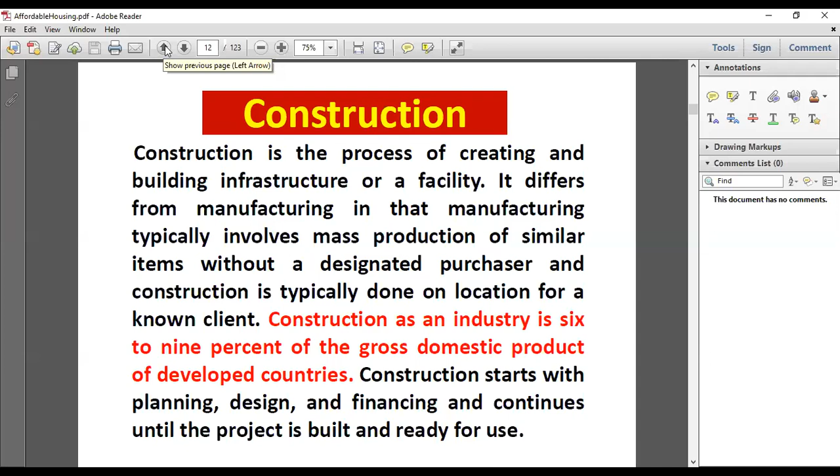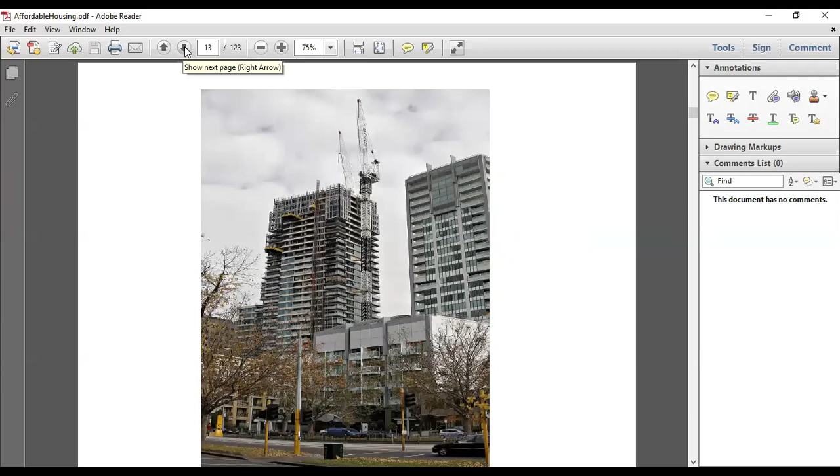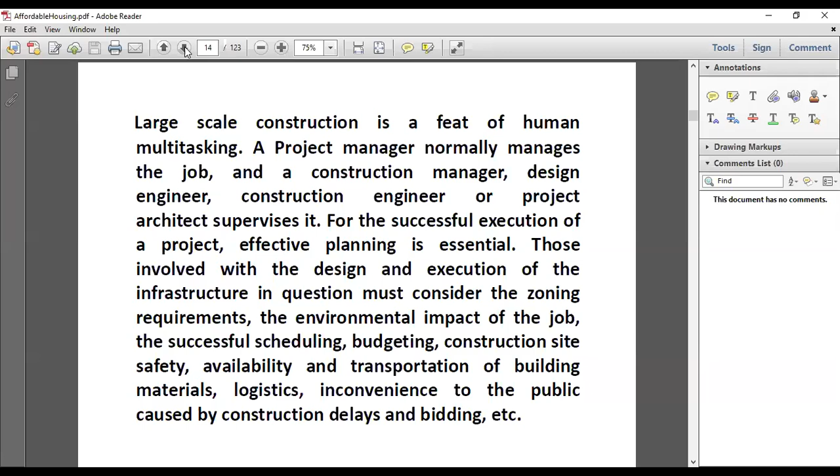This is the picture in every city. You will see high-rise buildings coming up, lifts and cranes are there, and construction is going on. Large-scale construction is not possible only by civil engineers. Now you need a mechanical engineer for firefighting and lifts, an electronics engineer, and a computer engineer too. So many people are involved in a big project. This is a multidisciplinary approach that we are going to adopt in construction.

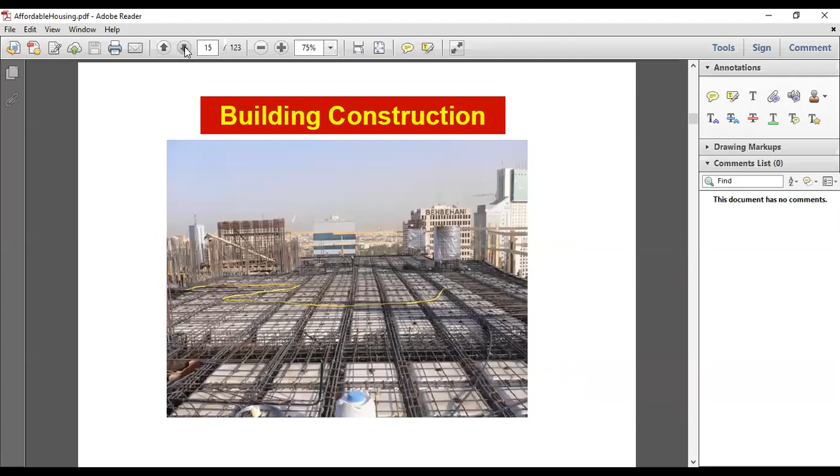This type of thing is going on everywhere. In every city you will see construction happening, maybe even in your neighborhood. This is a big challenge, and this scenario is everywhere prevalent, whether it's Varanasi or Bhopal.

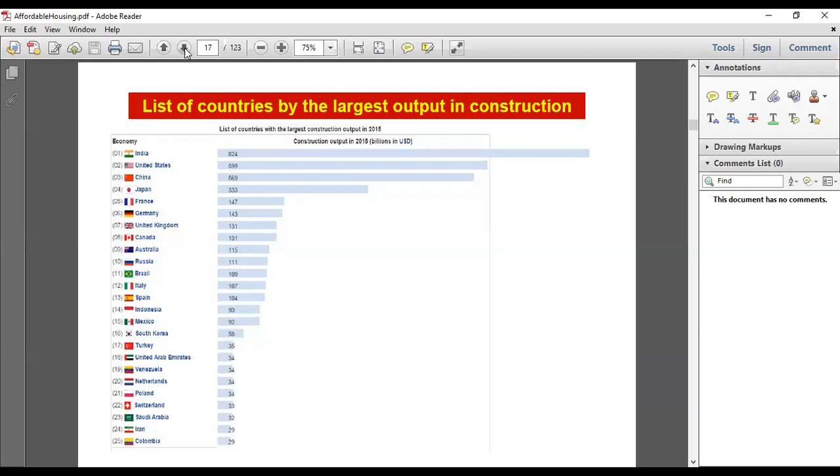There are following phases of construction: planning, design, and execution. In the planning phase, if you have not planned a building and are making construction without a plan, the building is not going to survive an earthquake, because the first part of earthquake-resistant building is good planning. If you make an unplanned building with a different shape that is prone to earthquakes, whatever material you add, you are not going to make it safe from the earthquake point of view.

So planning is very much important, and planning is important in every part of our life. I think without planning you should not do anything, because otherwise you will have to repent it and go back. So without planning, I think we should not do anything, like in building also.

Then comes the design, where application of modern software tools is there now. If you are a civil engineer, a BTech student, you must have knowledge of STAAD, ETABS, SAP. These are the software, because nowadays methods like moment distribution, slope deflection, or Kani's method are not being used in practice. We teach them in class, but when it comes to the design part, we go into the software only. So we should know the language of the software, and I request all students to get some training on this. In IIT, we have a 2 semester project where we give this software-based training through exploratory projects and UG projects, where students have to analyze these softwares. This is part of our curriculum, and I think you should take advantage of it, because any design nowadays is only done on software.

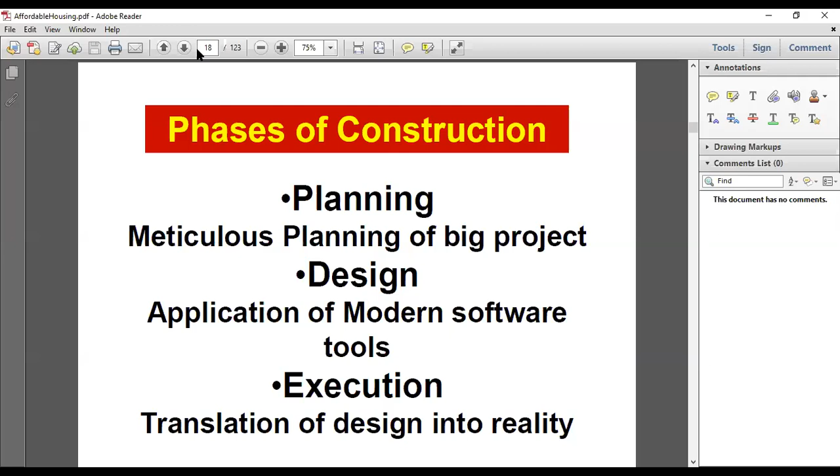Execution is also very much important. So these are the construction phases, and now building material. Without material, you cannot make anything. Material makes your dream into reality. So what are the building materials nowadays?

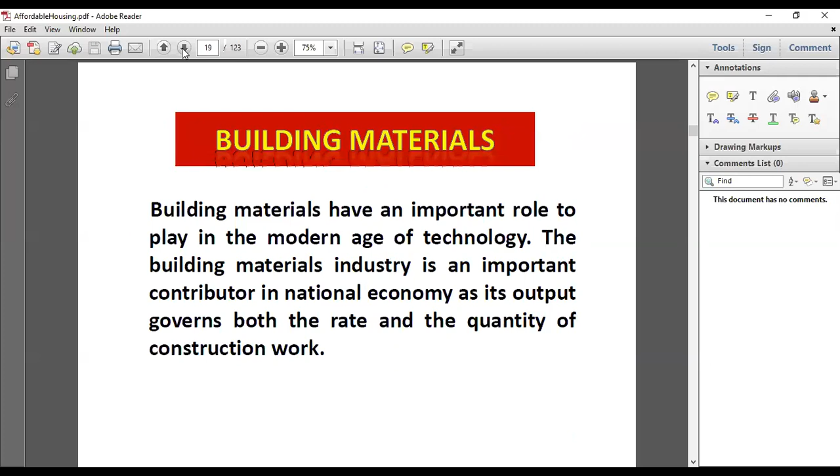Material requirements are very stringent nowadays. You want a material which has strength at both low and high temperature. If you have sub-zero temperature and also a very high temperature in summer, your material should sustain that. Previously this was not required, but nowadays we have materials designed to sustain huge variation in temperature.

Resistant to the ordinary water and sea water. If you are making coastal area, then there is salinity in the water, and you have to make it resistant to that. Otherwise, durability will be hampered, and the building will deteriorate.

Then alkali and acid. Nowadays you see that a lot of acids are there in the environment. And today is World Environment Day also, so I should congratulate all of you - let us save our environment and do something, so that as an engineer, it is our responsibility to save our environment as well.

So alkali and acid is the pollution which is coming in the form of acid rain and all those things. So we should also select the material which is resistant to that.

And material for interior decoration - now you see interior decoration is taking a big role, and many times the cost of interior decoration is more than the cost of the building itself. So you have to choose the material which has long life and which gives good quality.

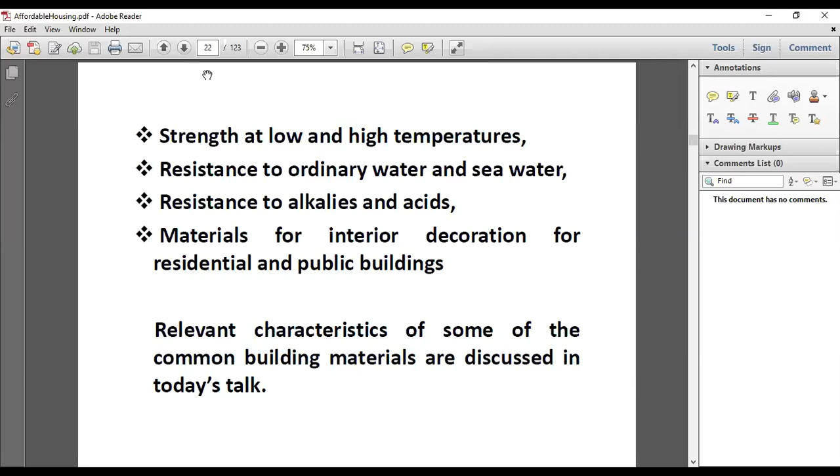So these are the characteristics by which you have to select your material, and this is the judicious selection by a civil engineer. So these are the materials which we commonly use. And today this is a very preliminary lecture.

So in this I am just going to talk about some very simple tests which we should perform on these materials so that you can know what is their quality.

Because I am going on many sites here in UP, and I see that they don't do the basic testing of the materials. And that's why if you make a full building without doing any test, then after 5 years deterioration takes place, cracks are coming.

Now people ask what is the use of a civil engineer when a building doesn't have a life of 5 or 10 years? Even a mason can do that. So now this is a question mark for our engineering education.

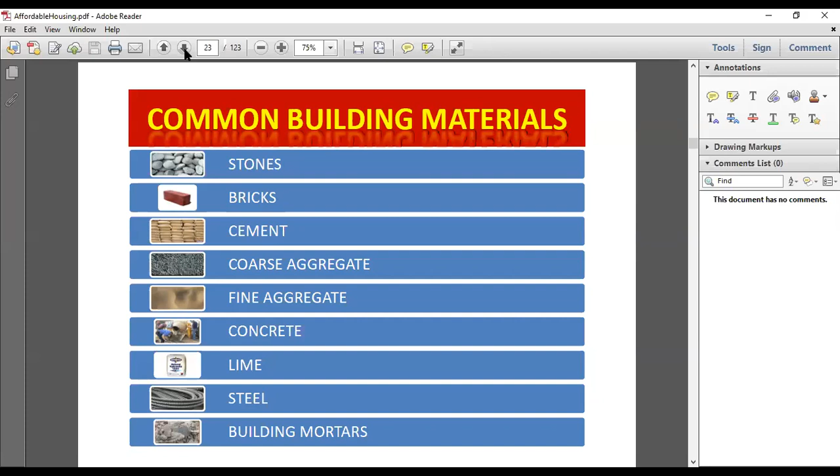So that's why I request all of you that at least you ascertain - like in stone, I will tell you that you just have to make 2 or 3 tests. If you just do 2 tests, you can improve the quality of the stone. But we are not even bothering about the 2 tests. So what are those things?

And if you see the history of material, you see that man has been using material since 8000 BC. Before that it was Stone Age, Mud Age, then came the sun-dried brick, and burnt clay brick came in 4000 BC when fire was discovered, and then came lime for binding material, which is now totally replaced by cement.

Then glasses came, and then you see aluminum, and after that iron products started being used in 1350 BC. So you see quite old material, and nowadays composite materials are very much used, and cement is also a very latest material, you can say.

It was invented 150 years back in England. So this is a very good type of binding material, and in the market you can see there are 20 to 30 types of cement available for different applications.

Now which cement you will use for which application, that knowledge has to be there. Because if you are having some low heat type of work and you are using high heat cement, it is going to make a crack. So for dams, which cement you will use, for buildings, which cement you will use - that's why we must know the quality of the material.

And if you are having some low heat type of work and you are using high heat cement, then it is going to make a crack. So that's why we must know the quality of the material.

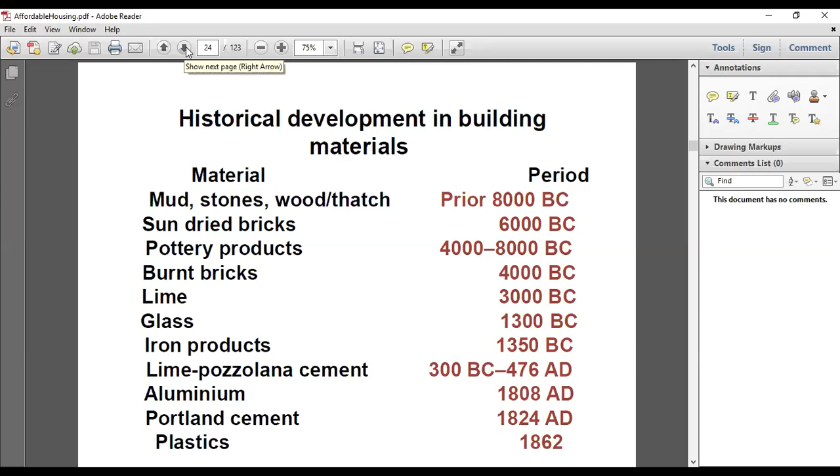Difficult, very costly - transportation is very costly, so we don't use it. But sometimes for cladding purposes we use stone. Our inner part is brick and outer part we make stone, to make it a massive structure.

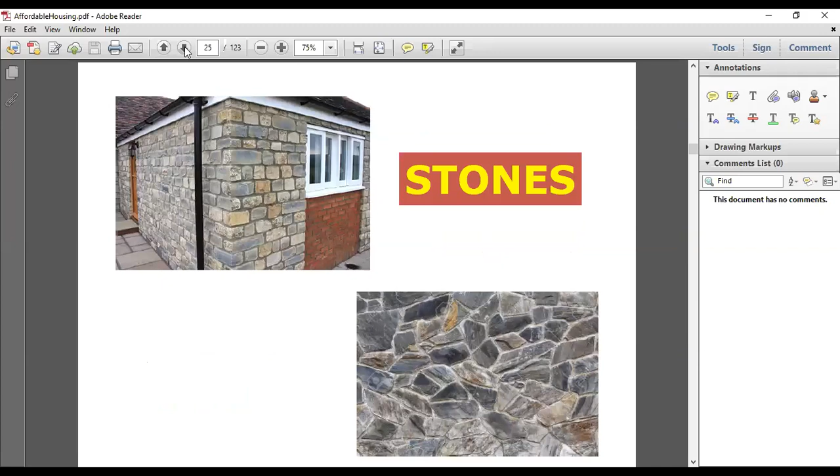But if you are using stone for your application, then what are the tests you have to do? You just simply do 2 tests: strength and durability. You know that stone has very high strength, and sometimes strength can be as high as steel itself. So for the compressive strength of stone, like granite or sandstone or any type of stone, we must do the cube test in the lab.

Suppose somebody is giving you very low strength and saying it is granite. How will you know that it is granite or not? Just by color, you cannot say it is granite. So this will come from the strength testing.

You must do the strength testing in the lab. And many times I've seen people become very complacent, and whatever the supplier is giving, they believe in this and they don't do any engineering judgment.

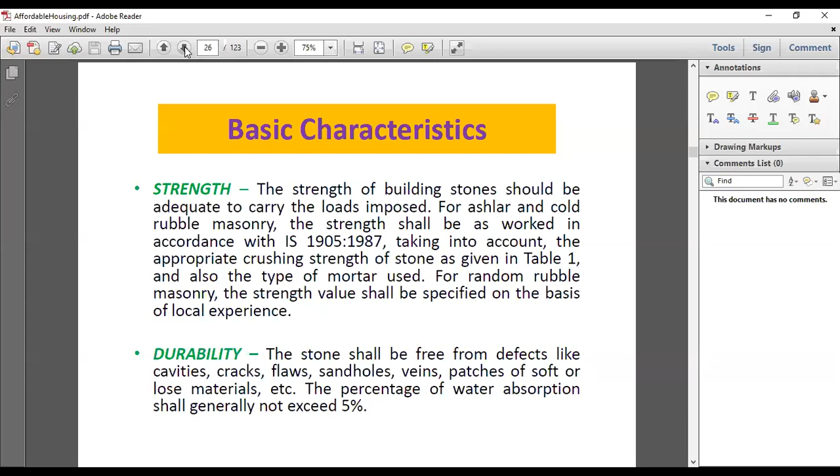Second test is durability. A durable stone must absorb very little water, it should not exceed 5%. If it is soaking more water, then it is not durable, so you have to discard that stone for building construction purpose.

The code has given this test data: for granite, the strength should not be less than 100 MPa. Similarly, sandstone 30 MPa. If somebody is giving you marble, you test it, and strength should not be less than 50 MPa.

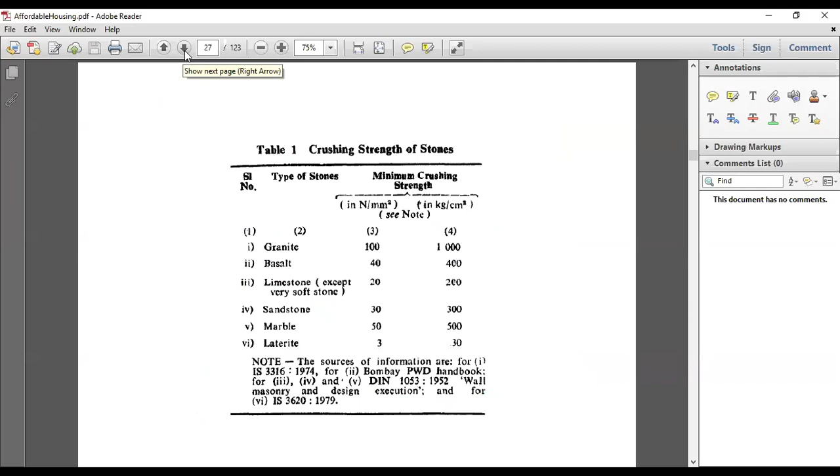So these tests are a must, and as I said, water absorption should be less than 5%. These two simple tests, if you perform on your stone, you are going to enhance the durability of your building. But many times we are not even bothering about these two tests.

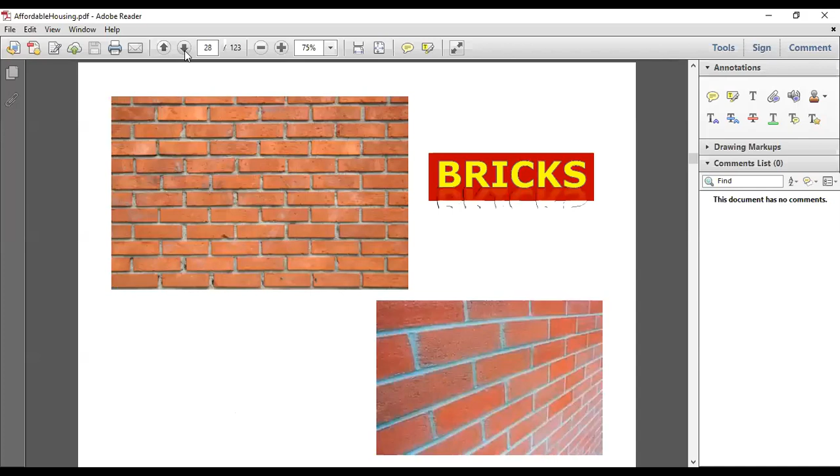Now comes the second material, which is brick. Bricks are nowadays being used only for the partition wall. We are not making any load-bearing structure, especially in villages people are making, but in city areas we are making frame structures where brick's role is only partition.

So what are the tests that you have to perform on the bricks? Many times you must have noticed there are white patches in the bricks, and how to ascertain this is important.

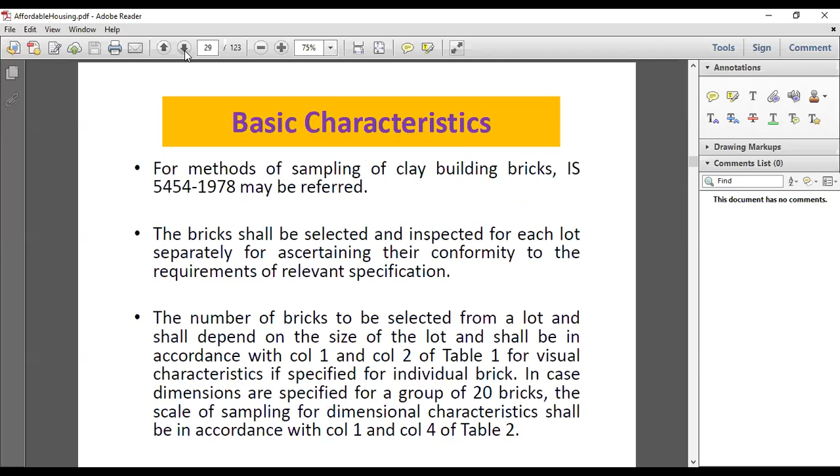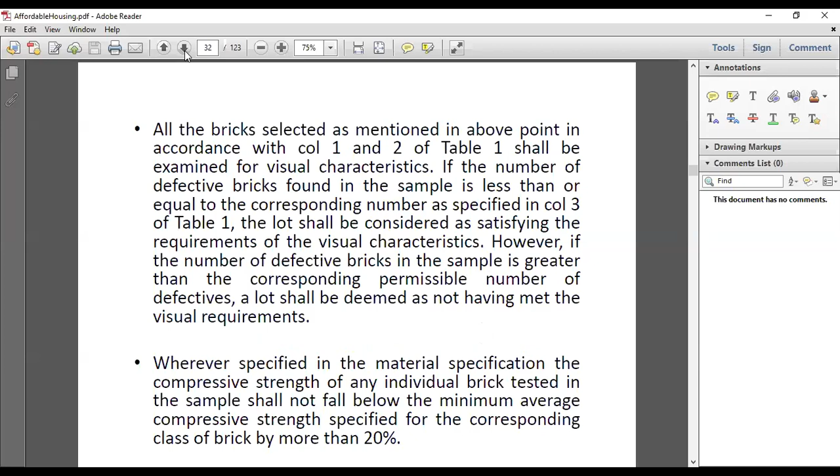These are the dimension tests, where you select a sample of bricks. I will give you this simple test to classify the brick, and there are classes up to 35 class of brick. We make the selection. This is the building brick where strength has to be up to 35 MPa, and this test you have to perform in the lab.

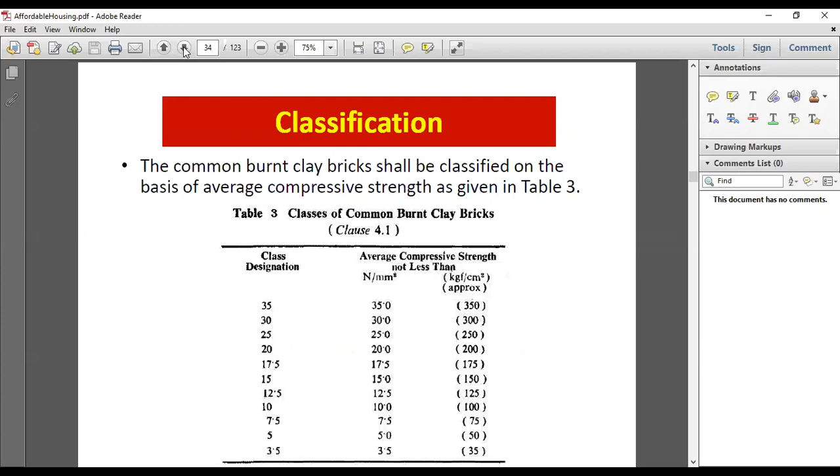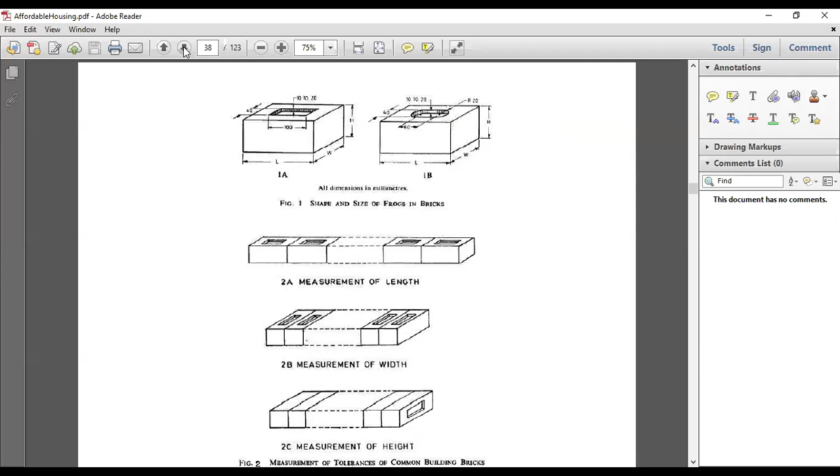This is the dimensional test, what should be the dimension of 20 bricks when added together. You lay the bricks one by one, and test the combined length of 20 bricks, then divide by 20 to see the average. A plus-minus tolerance is given in the code. There should be no warpage and no bending, all those things need to be checked.

Now compressive strength test, this will give you the class. Water absorption is also very much important.

If brick is soaking more water, then there will be damping in the building all the time, and this can cause asthmatic problems and so many diseases because fungus and bacteria will develop there. So water absorption should never be more than 15% for first class brick, and for second class brick it can be up to 20%. If it is soaking more, then it is a problem and you have to remove it.

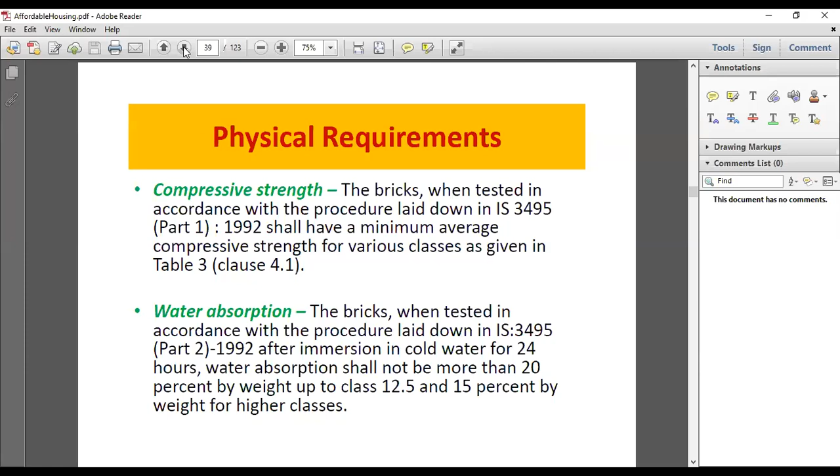Now one test is called the efflorescence test. Many times there are white patches in the bricks because of the alkali available in the soil. You have to remove this immediately, otherwise no plaster will stick on it, and your building will always have damping, and unclean scenes will be there, which is not desirable.

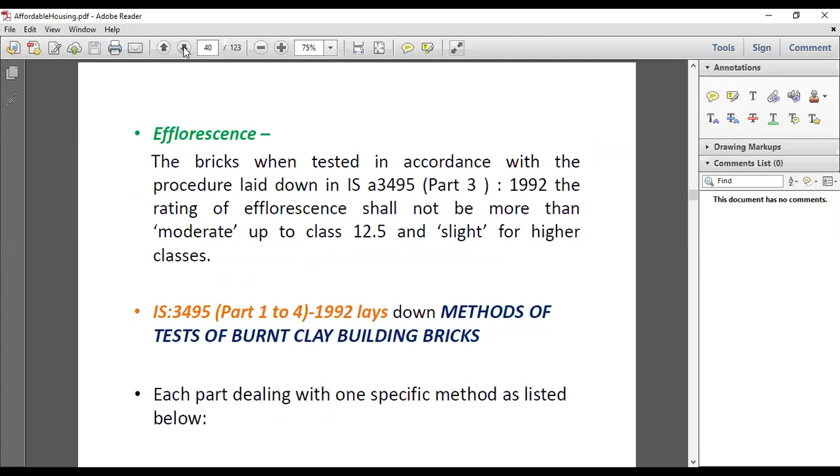So these are the codes dealing with bricks. IS codes are there, many codes are there. I'm just giving the list, so this can be used.

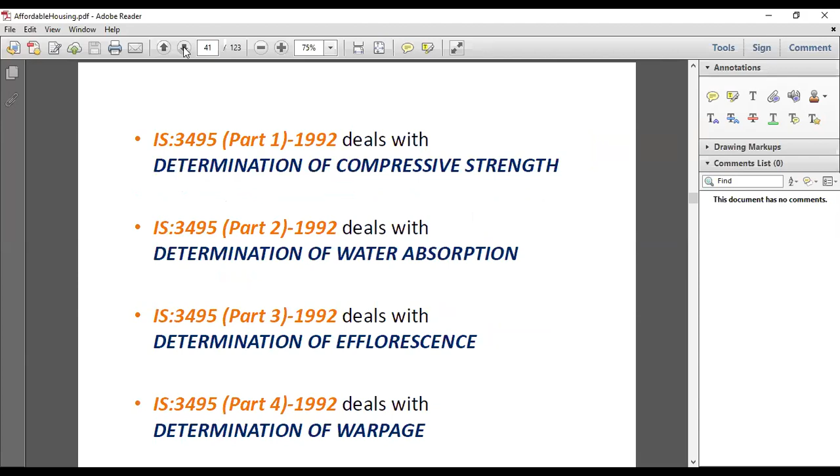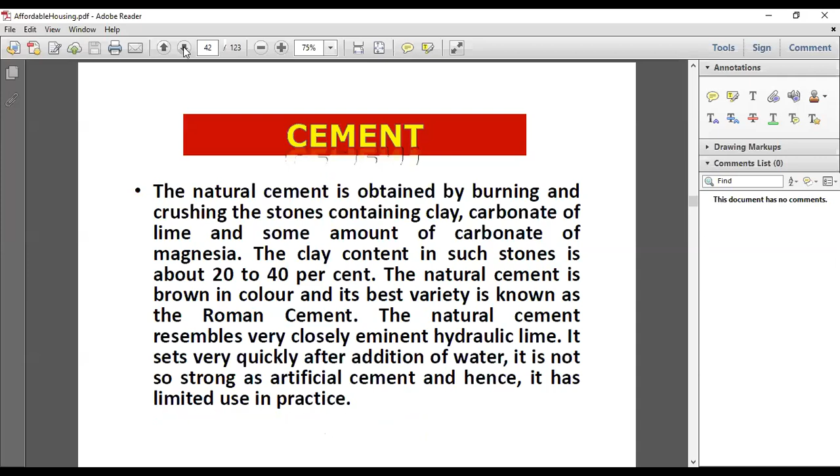Now the other material is cement, which we use as a binding material. This is mostly used now, lime is not used anymore, and cement was invented 150 years back. So what are the tests we require?

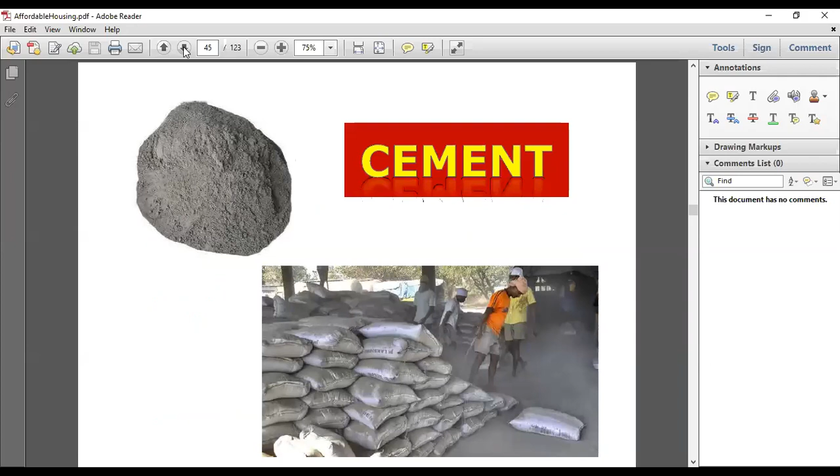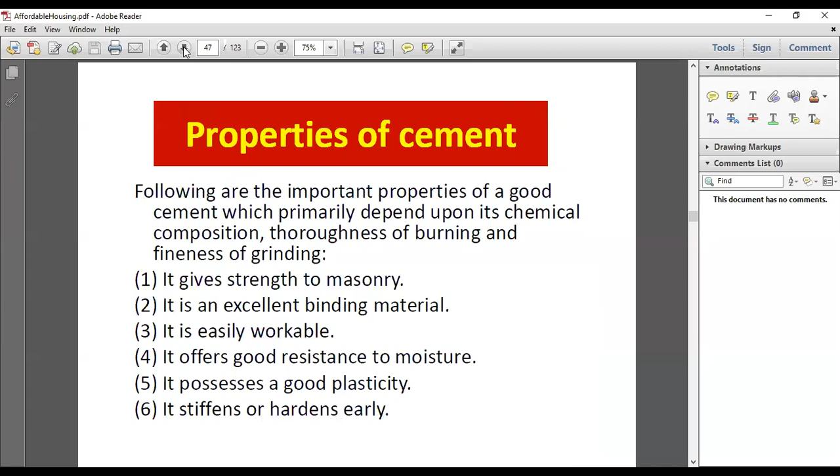Many times we have to do the chemical composition testing, whether cement is adulterated or pure, you will not know. These are the properties by which we test cement. One test is specific gravity, which should be more than 3.15. If it is less, it means there is some fly ash addition or something, and you have to reject it. Many times people cheat, supplying bad cement while charging full money. If you do this test, you can find out.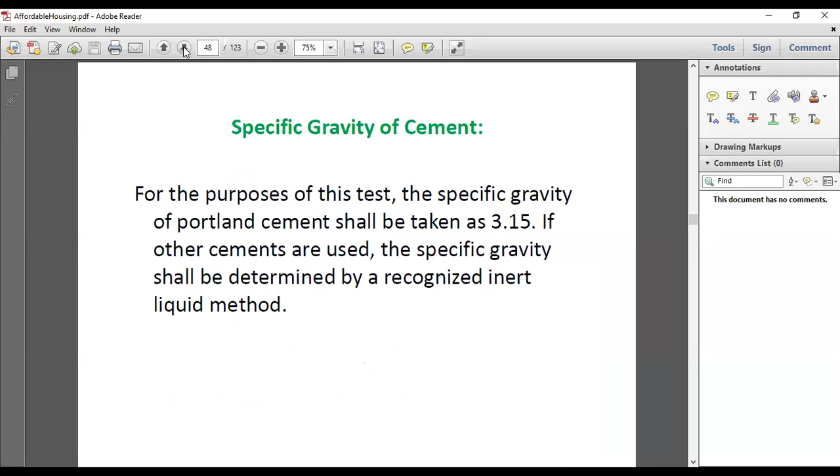Other test is fineness test. By sieve analysis, in 1 minute you can find out the fineness. Then comes soundness test. It should not expand much, it should not contract much, otherwise durability will be hampered. For this, simple tests are there.

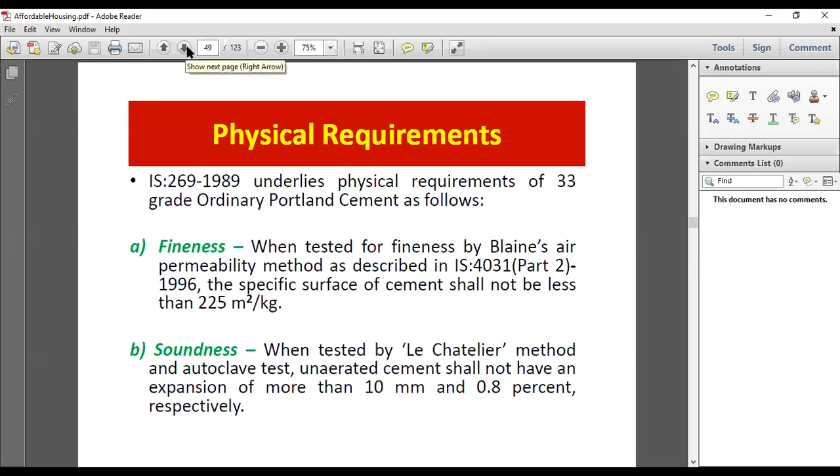Other test is setting time, both initial and final setting time have to be tested. Many times cement doesn't set because it has been adulterated with fly ash. So it is not setting, and when you remove the prop, the whole slab comes down. This is the problem of setting time, so this has to be tested.

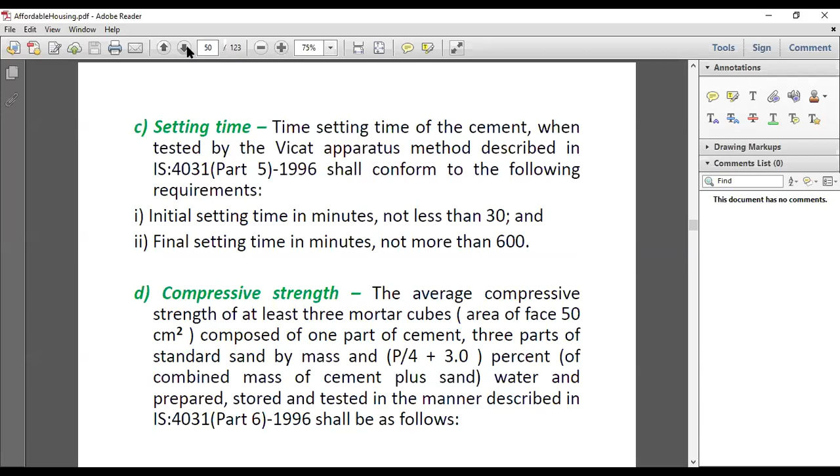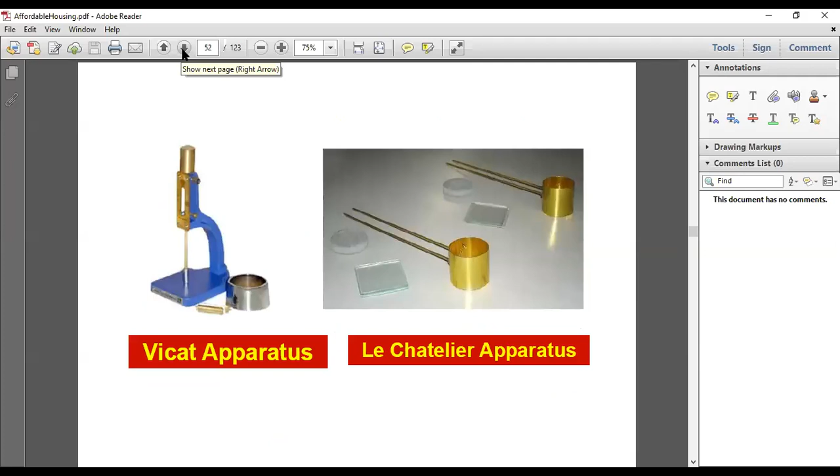Compressive strength test is also needed, whether it is 33 grade, 43 grade, or PPC, you have to check which grade of cement it is. I think in UG classes you must have done this. The 28 day strength must be 33 MPa. These are the things we have to perform, and these are the equipment. I think you know all these things we have used in our labs.

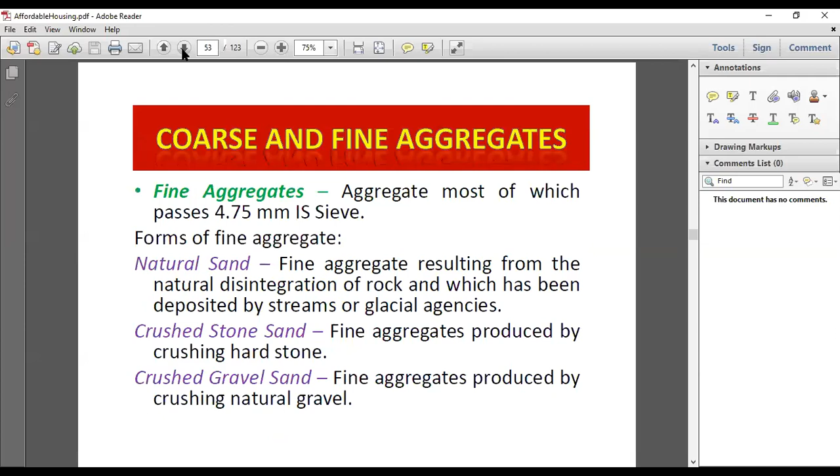Now one of the big problems is aggregate. You know that in concrete, 70% is coarse and fine aggregate, but we never test it properly. Sieve analysis is a must for this, and through sieve analysis you will know the gradation. Because if there is not full gradation, there will be voids, and there will be water absorption, acid ingress in the concrete, and it will reduce the strength of the concrete.

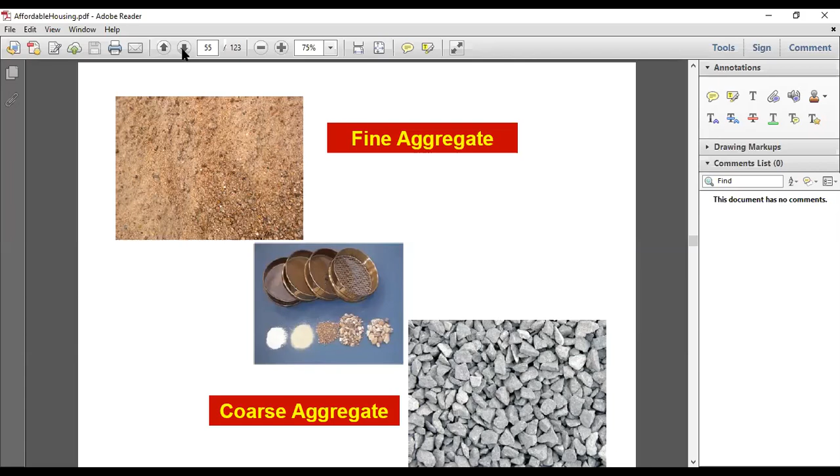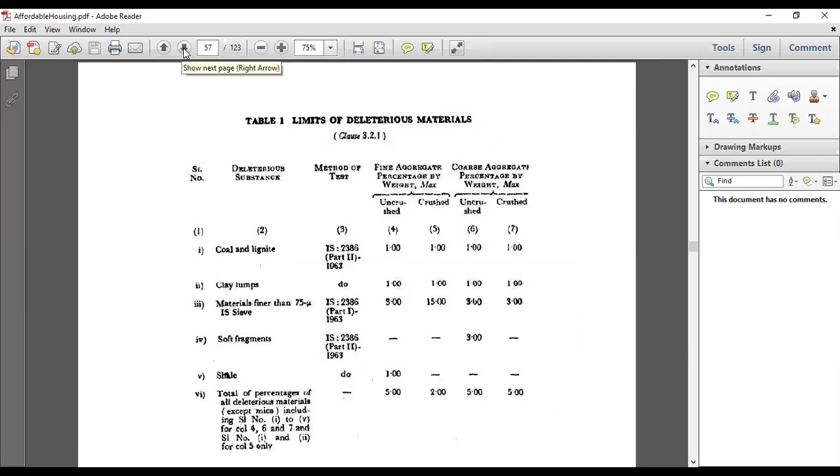That's why there are many times deleterious materials—coal, clay, soil—but people don't remove it. This has to be removed because aggregate gives the strength. Cement's role is only binding, cement doesn't give any strength. The strength is given by the aggregates. So they have to be perfectly graded, so that there is full packing and no voids available for moisture to ingress.

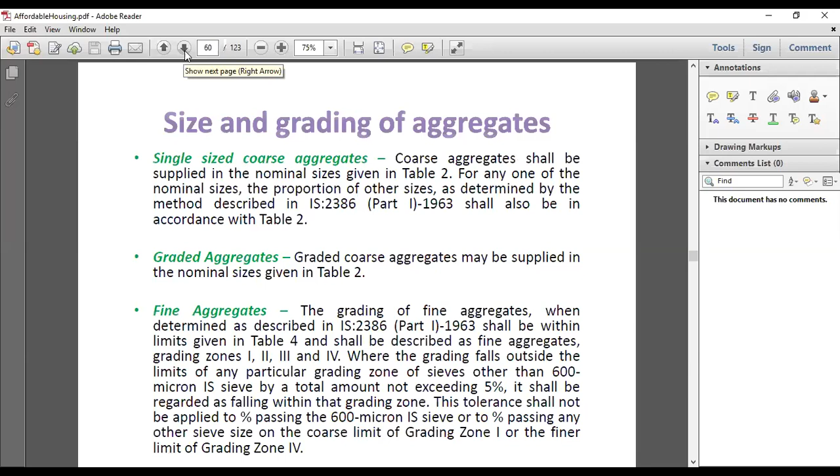These are the tests we do: aggregate abrasion test—if you are going for road construction, then you have to do abrasion test. Similarly, you have to do the soundness test. And for fine aggregate, you know that we should use zone 2 sand, but many times people are using finer sand, which is zone 4 or zone 3. That is not desirable, otherwise you have to compensate with proper cement.

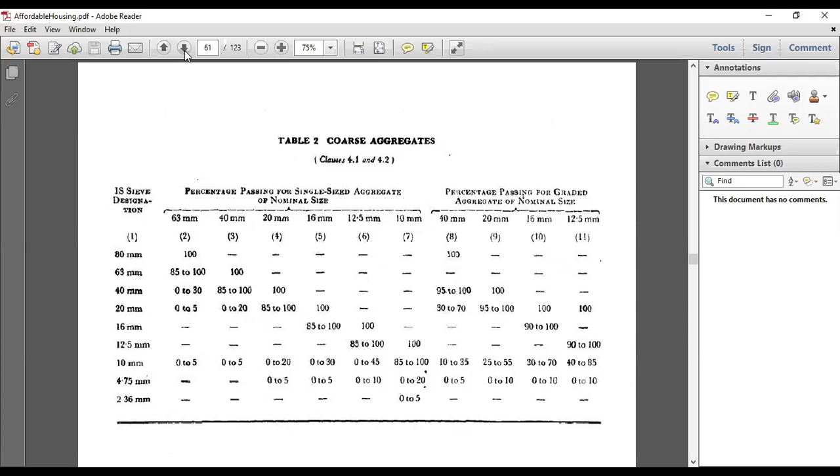If you are not using proper material in the concrete, you should not expect proper strength. If your input is bad, then the output is bound to be bad. That's why concrete is a composite material which you produce at the site, so you have to take full precaution in that. These are the aggregate tests.

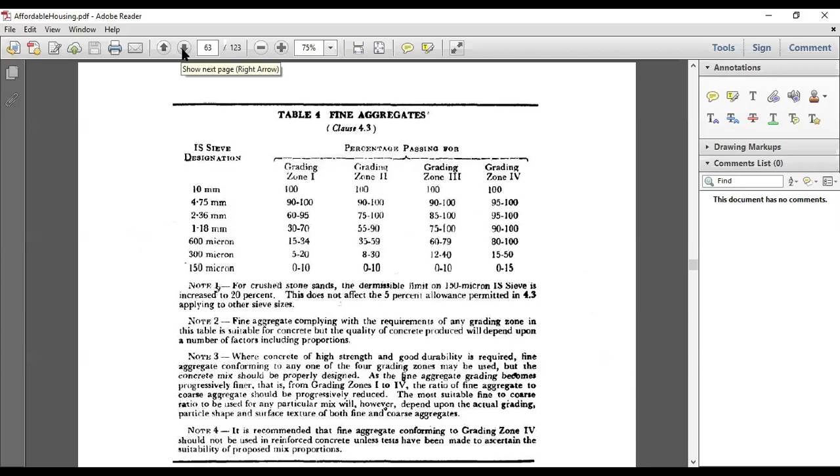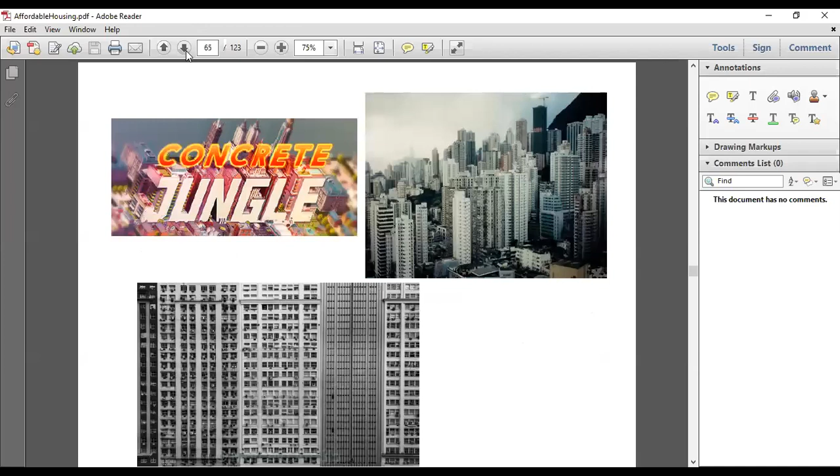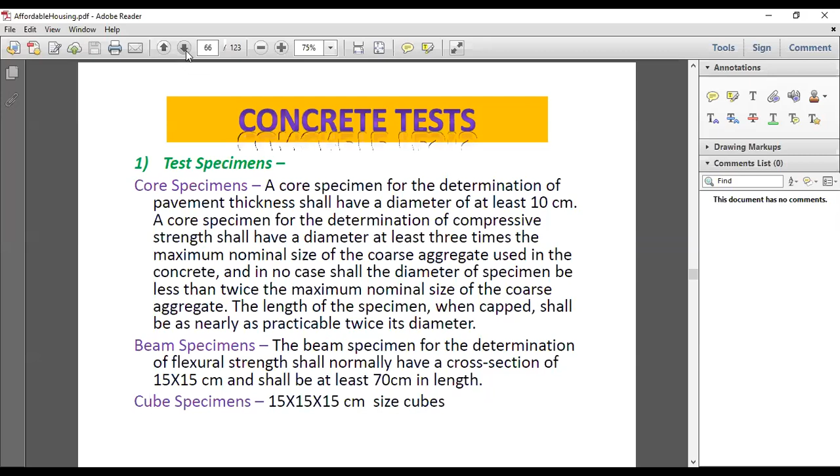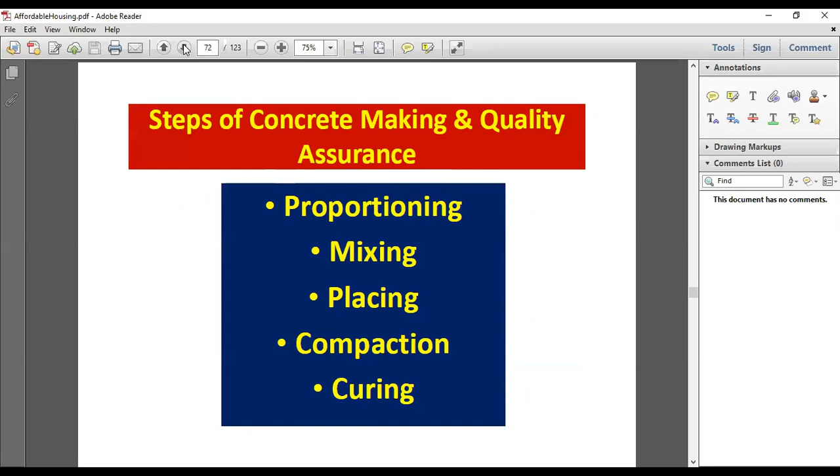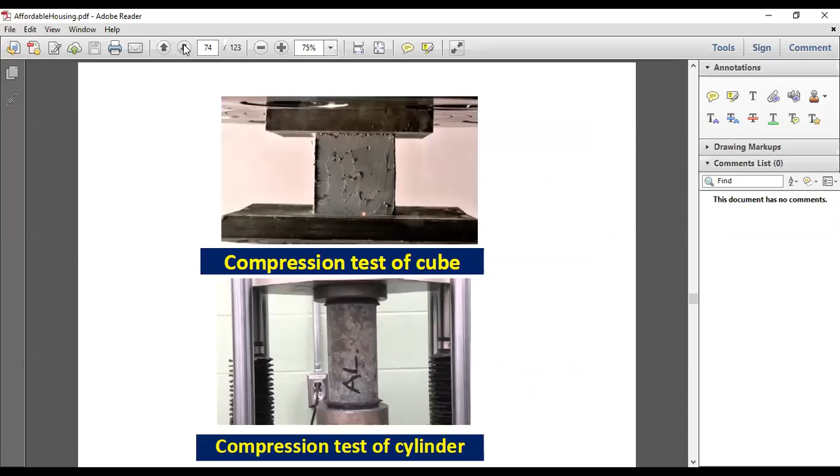In each part you should have the quality, so these are the various tests that we do. We can do the compression test by cylinder, or what you can do by the cube. So this has to be ascertained. And tensile strength is very much important. We should do by split tensile test, and then we do the flexure test, by rupture test, by bending. So in this way, you will come to know what is the tensile strength of your concrete.

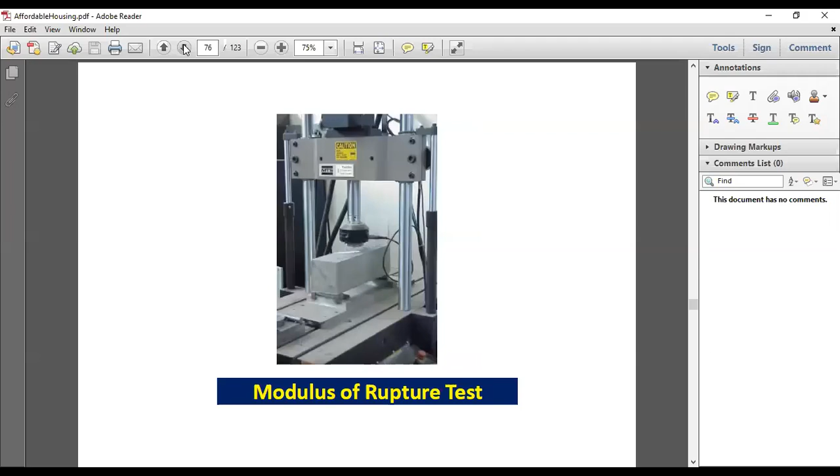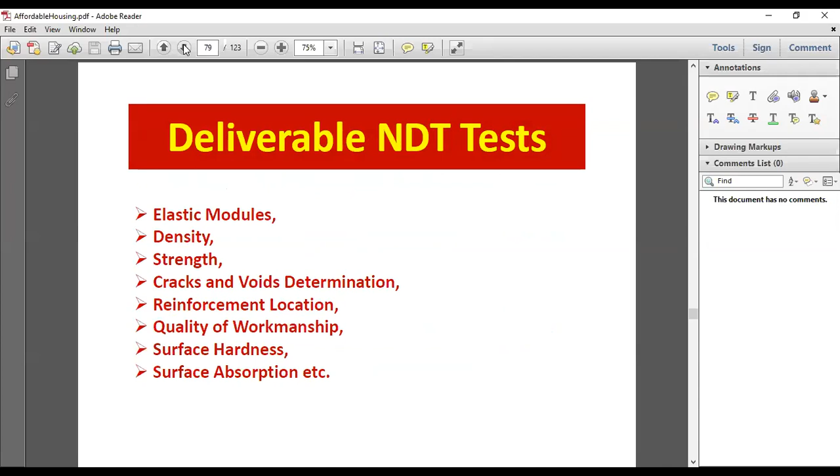And many times you can do NDT test, without doing any destruction on this sample. So these are the very simple tests, and they are cost effective also. You can ascertain various properties like modulus and density, strength, crack, all these things without doing any degradation. So these are the equipment: rebound hammer, UPV, and core cover meter. So in this way, we can do the testing, and see these are the rebound hammer.

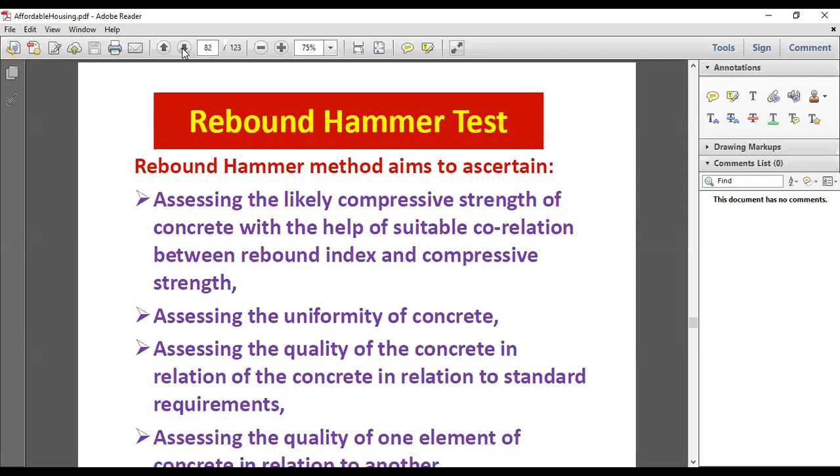I think you know that by a rebound hammer you can know the strength of the concrete just by making a rebound on this. So these are the very simple tests in laboratory, and we go at the site, do the rebound hammer. So these are the factors what affect cement, aggregate, all these things affect it.

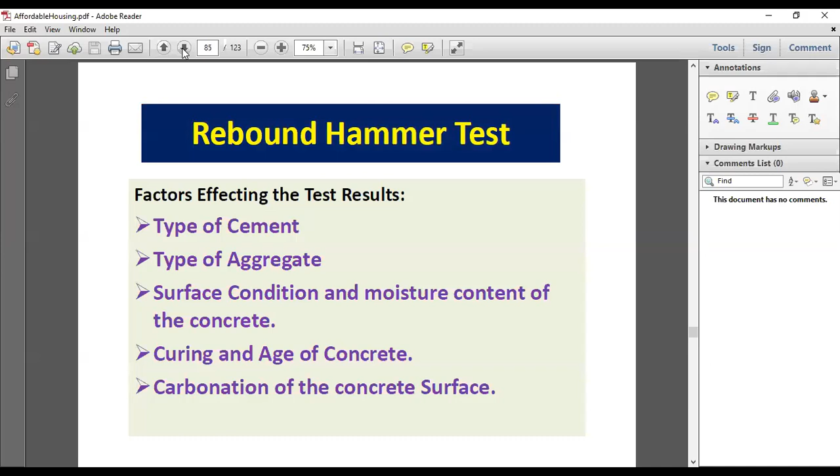And this is the mechanism. There is a lever and there is a spring by which you can come to know what is the rebound, and then this data is converted into your strength. So these are the very cost effective things what we can do. Let us take advantage, like doctors, they are taking advantage of tests. Similarly, we should also make the use of this test.

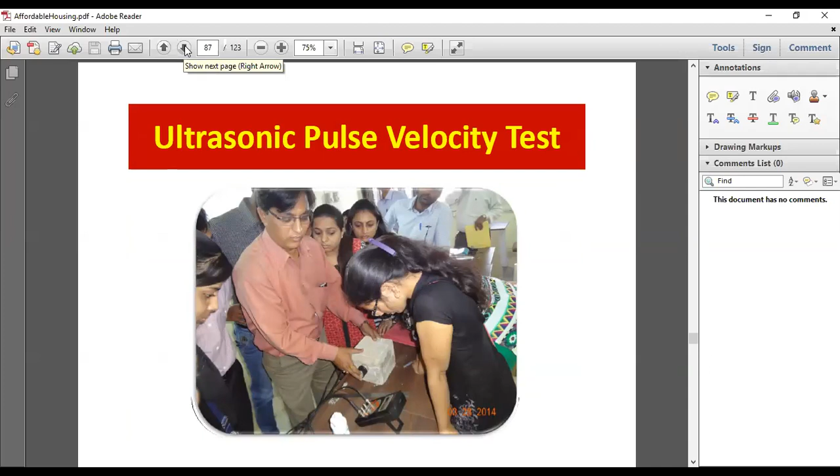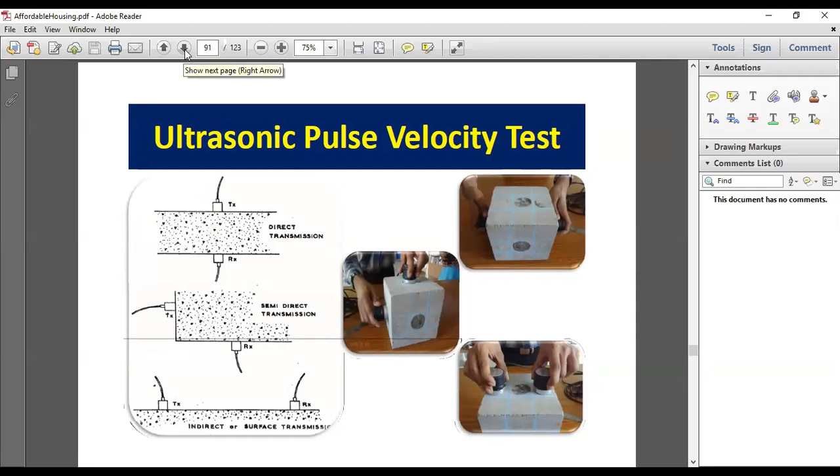This is pulse velocity, this is called the ultrasound of the concrete, and by which we know what is the porosity level in this. So just by sending sound waves in the concrete, you will come to know what is the travel time. So if travel time is very less, it means it is a compact concrete, and this is a very good quality. If time is more, then it is a poor concrete. So in this way, you will come to know whether pores or cracks are there, and you can remove it.

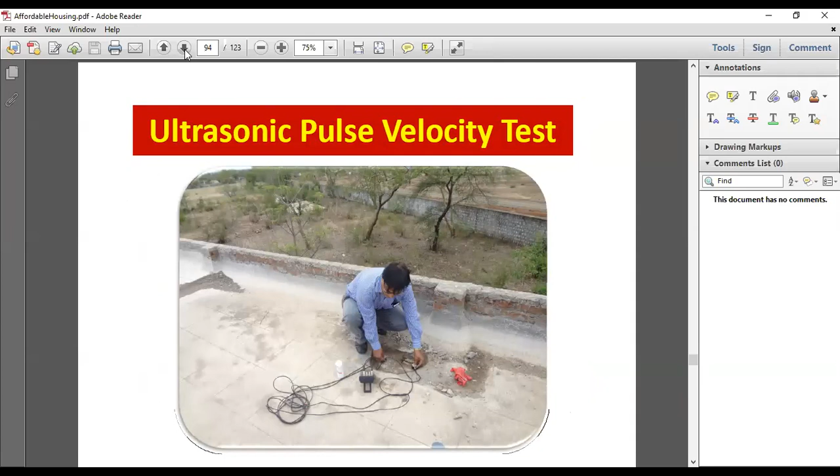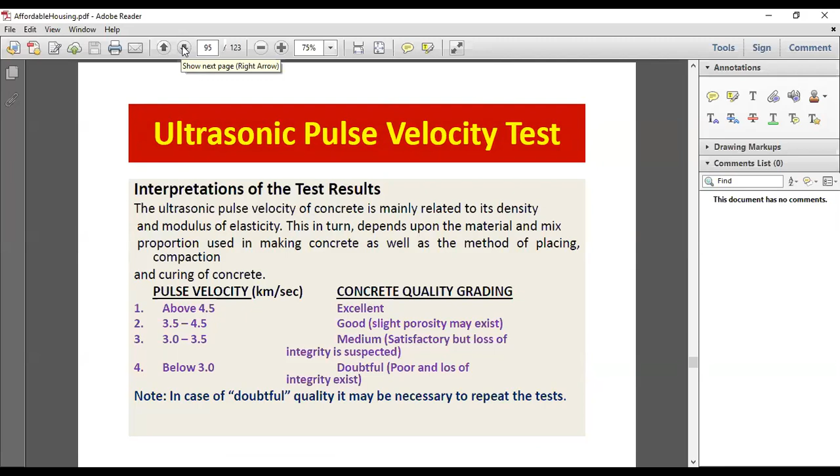So these tests must be adopted as new things. And this is the velocity: if it is 4.5 kilometer per second, then it is excellent, and below 3 it is doubtful concrete. And then we can go for repair and retrofitting type of things. These are very simple things I am telling, I am not taking any hi-fi research to you.

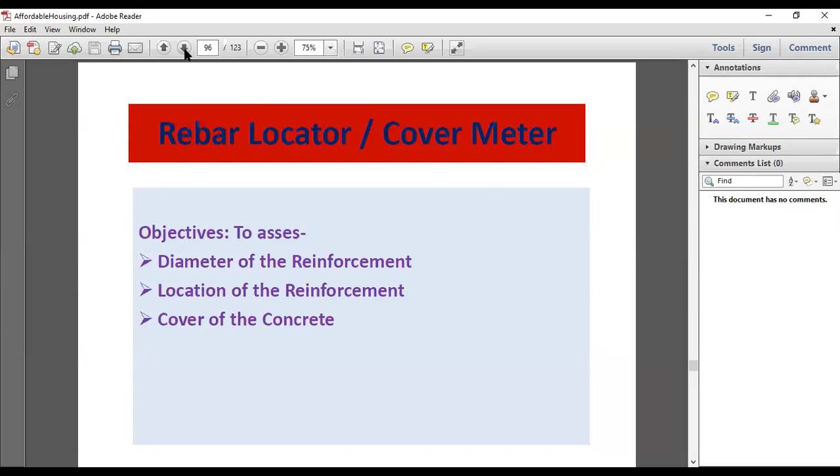And similarly, rebar locator and cover meter, by which you can know what is the diameter of the bar and what is the cover. Many times you don't provide the proper cover, and in this way, your concrete corrosion takes place. So you have to locate it by these equipments.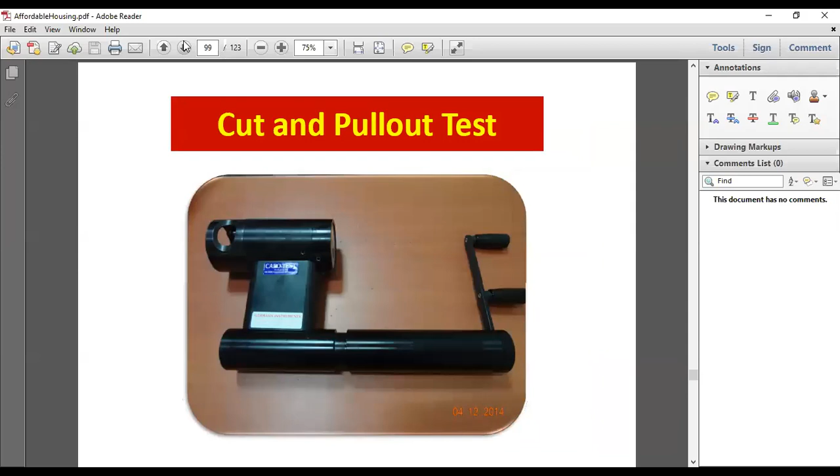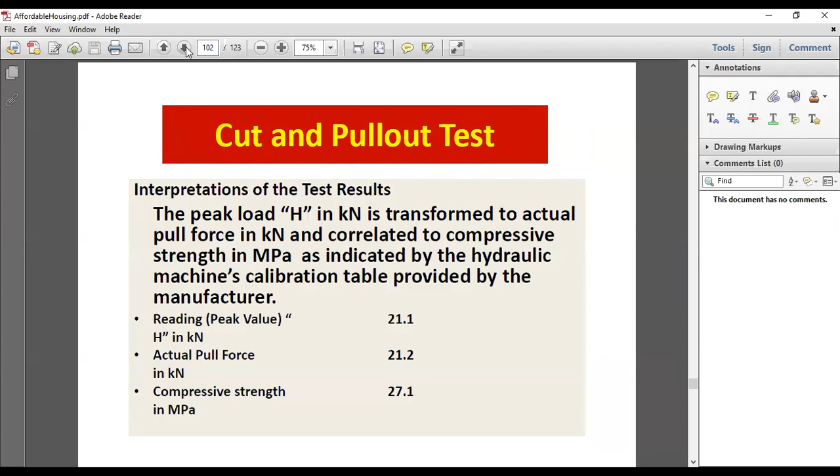So rebar cover meter is there, and this is again a CAPO test where you perform the CAPO test to know the strength of the concrete. Very advanced test, but it is quite costly, so that's why we take only few samples of this. If you want to know, literature is available on the net, so you can get it. So these are the samples, and this is the cut and pull out.

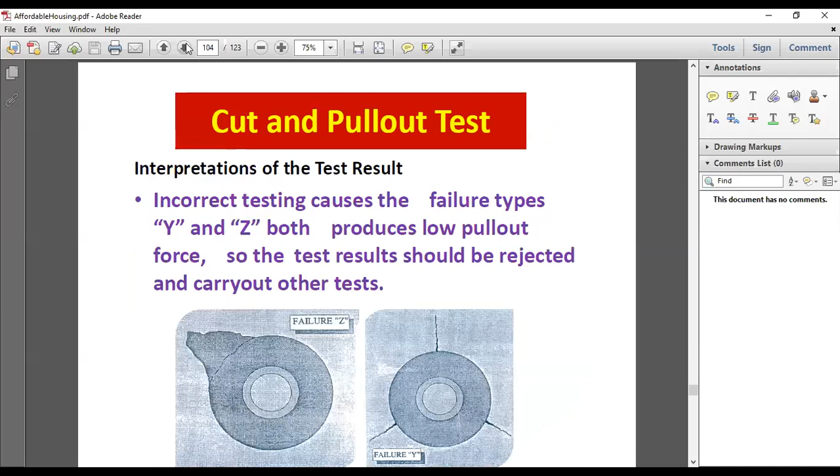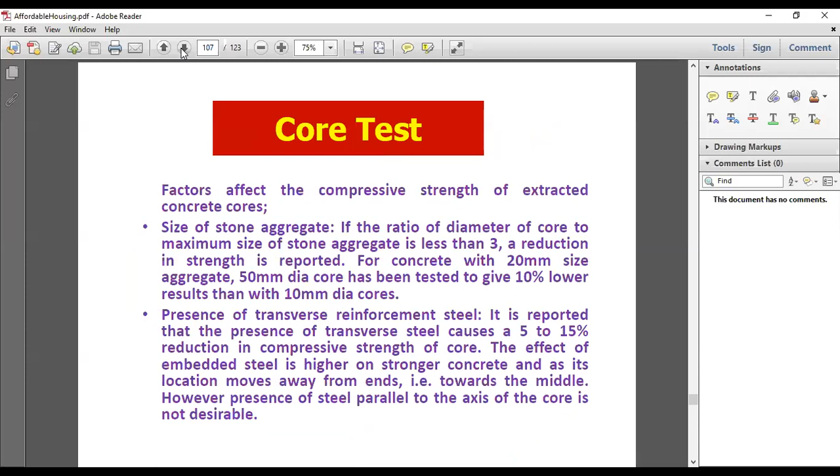Many times we do the core test also, then for roads and other constructions, we take a core and we test it. So in this way, various tests are there, and these are the core tests. Corrosion is also very much important. If there is an ingress of moisture, corrosion will take place, and this will destroy your building.

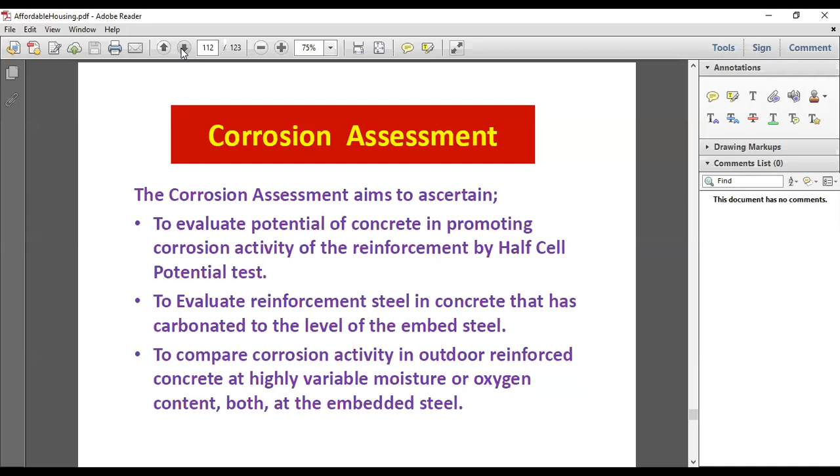If it is not alkaline, if it has become acidic, corrosion is bound to take place. So just by measuring the pH, you will come to know how much corrosion has taken place. So this is a simple reminder to you that these tests must be performed.

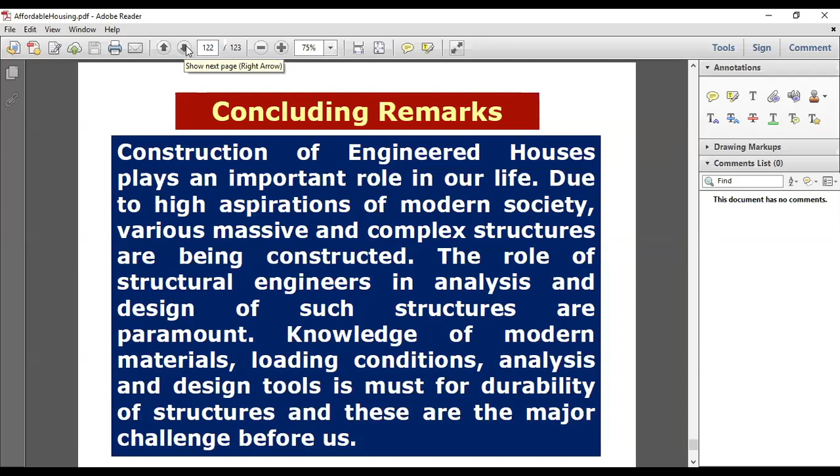And now I am coming to my conclusion that construction of engineered houses plays a very much important role. Due to high aspiration of modern society, massive complex structures are coming, and we must ensure good quality material, and then only your construction will be of good quality. So knowledge of modern material, loading condition analysis and design tool is a must for durability. So with this information,